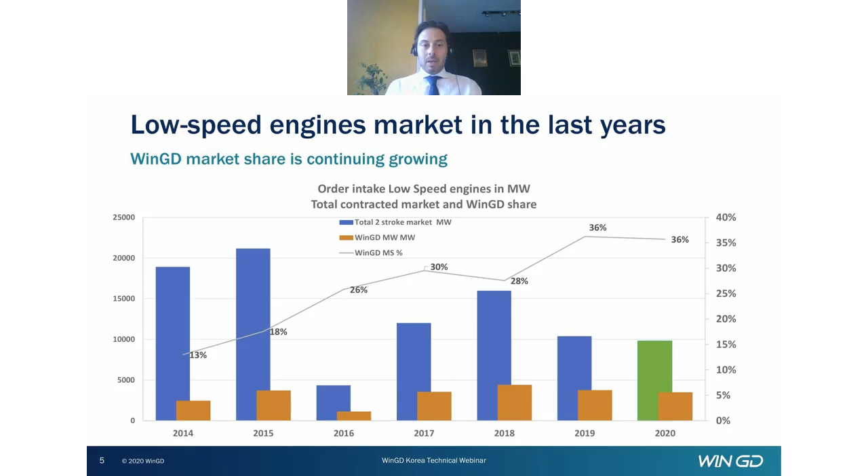About the ship market, the tanker market was quite strong. Many VLCCs were contracted. The market was relatively weak, but anyway, as expected.

LNG carrier was as expected, so a good market, a strong market. Overall, the expectation for 2020 was actually better than the forecast, but still the market is relatively low. We expect for 2021 a market recovery.

A little bit about WinGD and what we sell more. We sold last year 152 engines, 111 are XDF, and the rest are diesel engines. So XDF for WinGD represents almost 60% of our contracted volume.

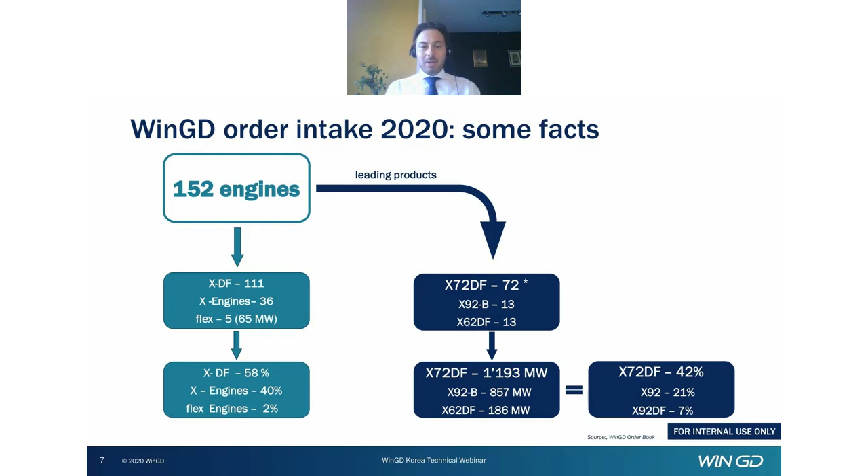Our best seller is the 72DF, especially for LNG carriers. But last year we also had 92B for container ships and some 62DF for other ships, not LNG carriers. So that gives a little hint about where our portfolio sells more.

Now, what is very important to remark here today is that our most important customers are Korean shipyards and engine builders. The first two shipyards are Hyundai and Samsung. The first two engine builders are Hyundai and HSD. That is very important to remark.

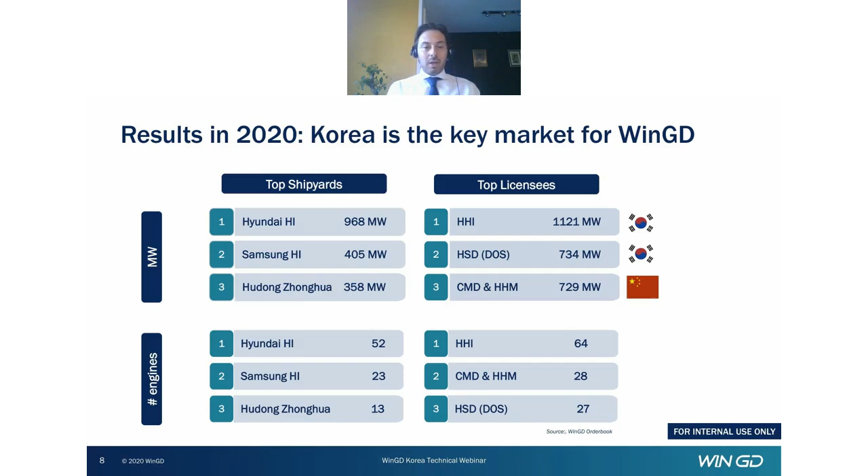WinGD believes that Korea is still our strong market. We have a very strong team in Korea. We want to continue the collaboration in the Korean market. So that is very important to remark. Our relationship with Korea is for us very, very critical and strategic.

Now let's see a little bit about the market in several countries. Globally, WinGD reached 36% market share. In China, we achieved 40% market share. I would say that the market last year was split between China and Korea. China had almost 5,000 megawatts, Korea 4,400.

In Korea, we reached 30% market share, a little bit less compared to 2019, but still, as I showed you before, Korea represents for WinGD the first customer. In Japan, the market is a little bit lower, only 384 megawatts, and WinGD still has a good presence there.

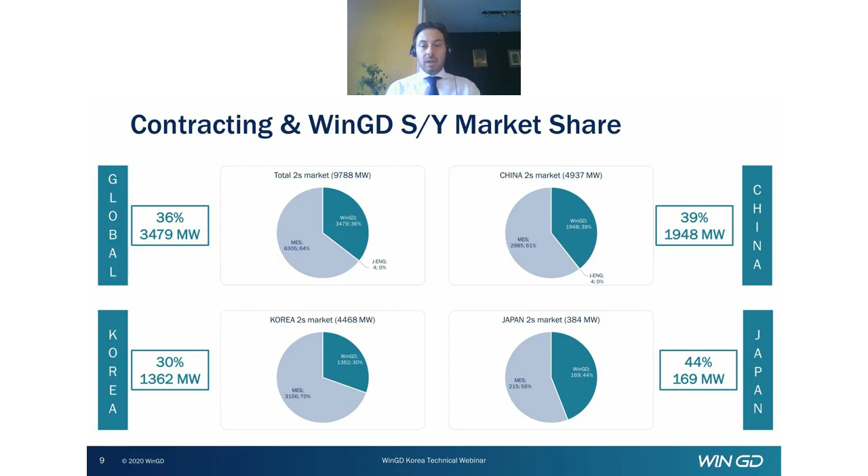For WinGD, the dual fuel market is very important—the LNG powered ships—which last year was very strong. 27% of the order intake are LNG fueled ships. That demonstrates that LNG is the bridging fuel, and the market share is increasing. The share of LNG powered and fueled ships increases more and more.

If we look at this 2,700 megawatts, almost 42% are LNG carriers, but 58% are not LNG carriers. That is a very important sign. WinGD has 60% market share for LNG fueled ships, so that is also remarkable. For diesel engines, we have 26% market share, but there is also some improvement, especially because of the latest engine that we have developed.

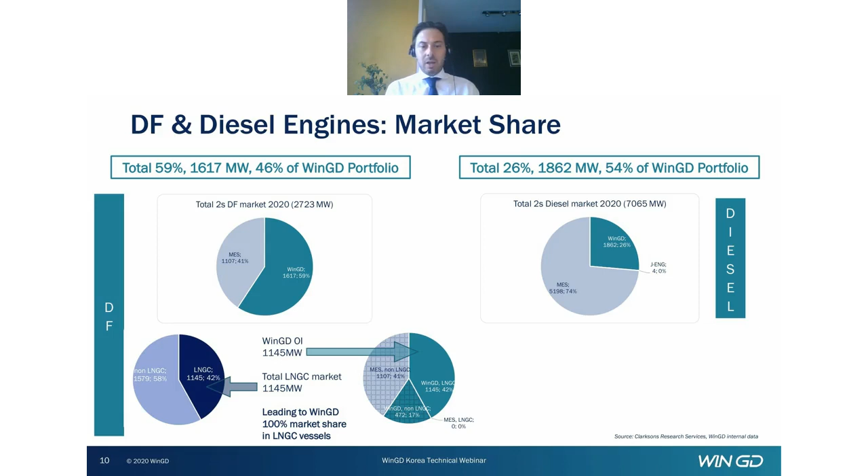Now, to conclude, for 2021 we expect the market will recover. According to market analysts, the total market will recover by about 30%. The segment that will have a good recovery is container ships. We already see a lot of activity at the beginning of the year, with many orders in discussion.

For LNG carriers, we expect an increase of about 20-25%, so more ships will be ordered. We also see a lot of projects in discussion. The bulker market will have a big jump—we expect it will almost double, more or less. For tankers, there are also signs of recovery.

So that's from my side. I would like to thank you. I would like to remark that WinGD wants to continue the collaboration with the shipyards in Korea. We believe that is very strategic for us, and we have in discussion a lot of projects, including the introduction of the XDF 2.0 with the major yards. We believe in the strong support of yards and engine builders. So thank you very much from my side, and back to you.

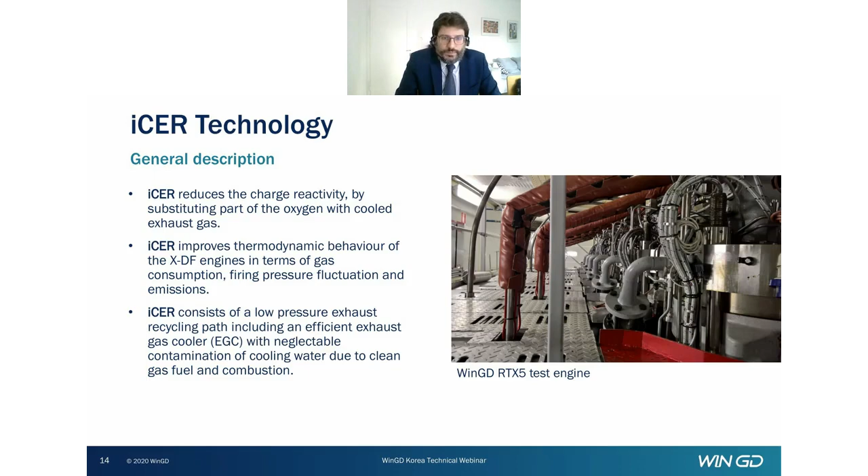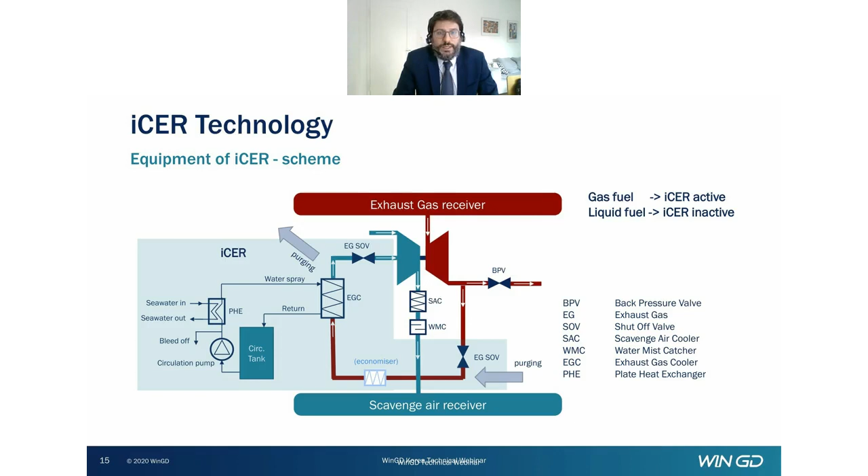Moving on, the benefits of the iCER are reduced fuel gas consumption. In addition, we have a reduced liquid fuel consumption when operating the DF engine in diesel mode, which is a result of the increased compression ratio achieved by installing the technology on the XDF engines. And of course, last but not least, we have a reduction in the methane slip of up to 50%, which is a result of allowing the exhaust gases to burn once again in the cycle by recycling.

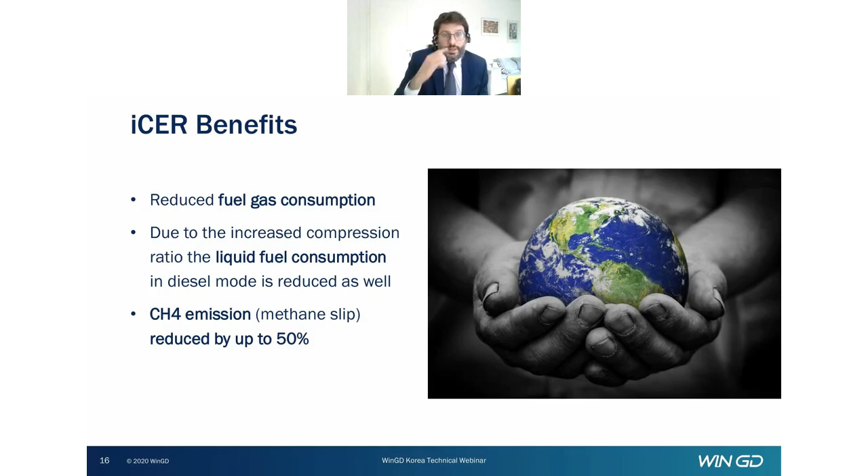If we look at the improvements in the gas and diesel fuel consumption, we've taken as an example a typical LNGC vessel, with the typical CMCRs for such LNGCs with 5X72DF. If we look at the graph, you can see on the left-hand side the improvements between the XDF and the XDF 2.0.

We're going from improvements of between 4 and 6 grams, and at the lower loads, of course, the improvement in gas consumption is better. This better improvement is a result of the firing pressures that are achievable, because at the high loads we are limited by the max firing pressure from the engine structure. Similarly, you see the improvements when comparing to the standard XDF engines in diesel mode.

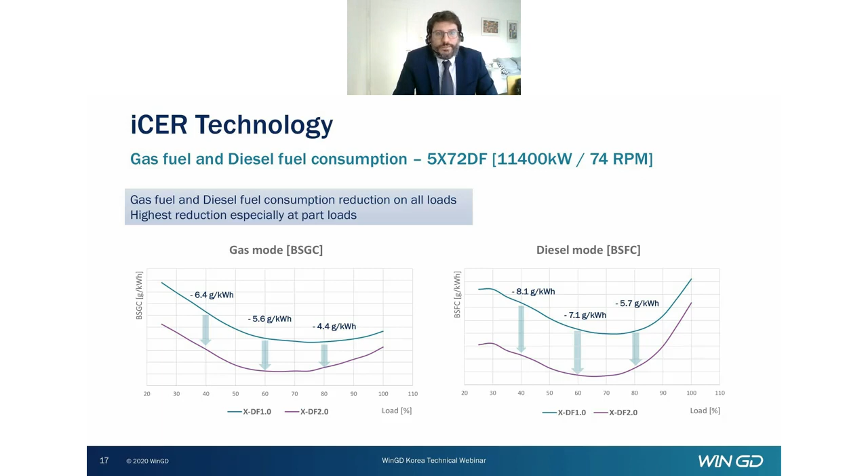Here's an example of the proposed arrangements on a 5X72DF 2.1. The ICER equipment is placed as close to the engine as possible. This ensures that we can have minimum adaptations to the vessel design, and use up minimum space in the engine room. This arrangement is possible on other vessel types as well, depending again on the engine room designs.

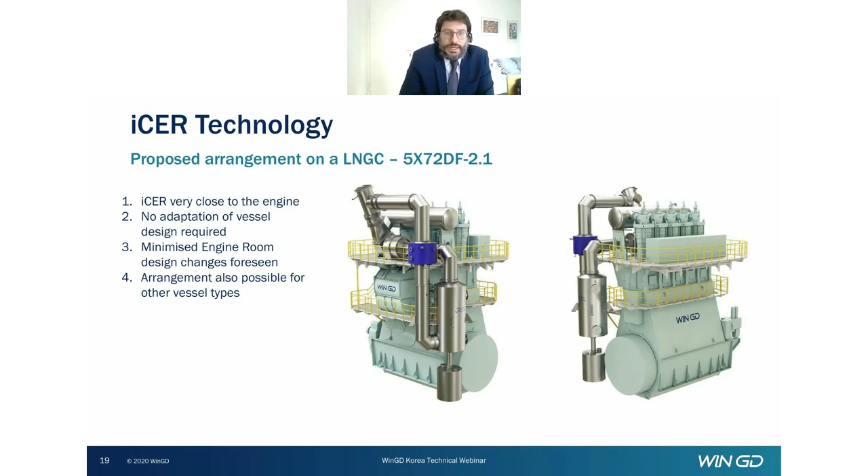Some information, just an overview about the differences between a standard X72DF and an X72DF 2.1 with the ICER technology. The engines with the ICER technology, in case of X72, are 5 to 7 cylinders at the moment, because we have first released the single turbocharger executions. Other differences compared to the original X72DF include a small optimization on the bed plate, a new bed plate with flexible main bearing girders.

The most important change is a new control system, moving to the WiCE control system instead of UNIC. The supply unit is the same. The fuel gas supply system can be GVU or our IGPR. The ICAT system is optional.

Then there are the ICER related updates, which include some changes - a new design group on the engine side at the turbocharger inlet. And in the engine room, mainly there's the space reservation required for the ICER equipment, and some changes to the MIDS related items for the cooling water system, exhaust gas system, and leakage collection system.

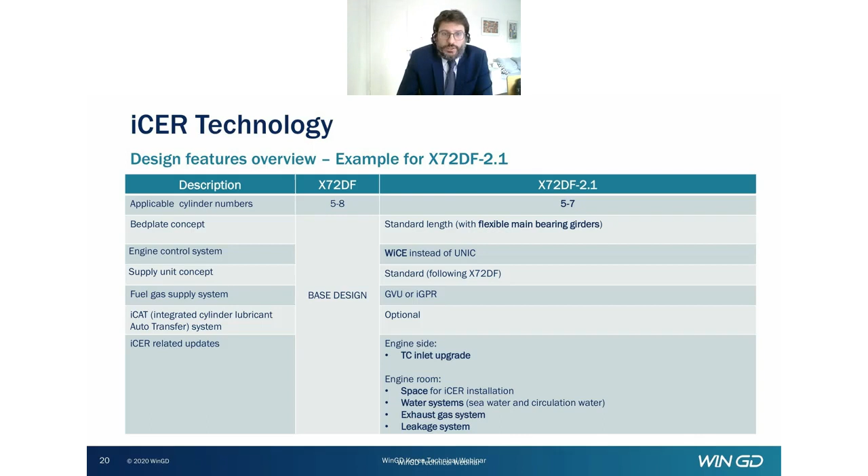Some information about the estimated bleed off water amount. The recirculated exhaust gases are cooled down to below the dew point, 42 degrees Celsius, so water condenses out of the exhaust gases, and bleed off water is positive most of the time. The final amount of bleed water will depend on the ambient conditions, and this you can see in the graph to the left.

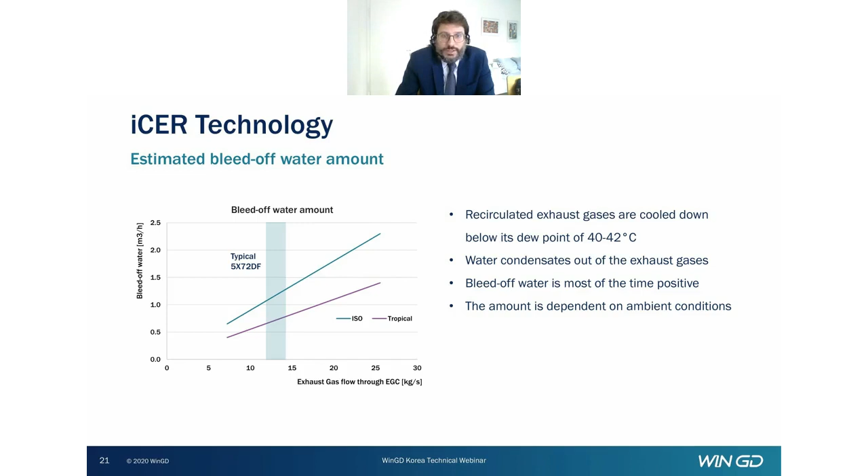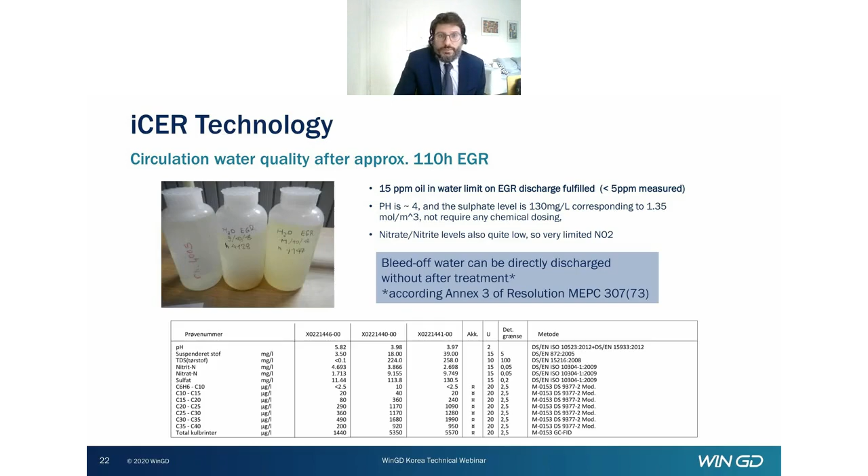With the ICER technology, we can improve combustion stability. On the x-axis, we show the gas reactivity, which depends on the exhaust gas recycling rate and the air to fuel ratio. The reduction of the pre-mixed gas reactivity leads to an increase in the ignition delay and slower combustion speed.

Increased resistance to auto ignition and the reduced combustion speed enable control of the combustion phasing even at higher loads, and a reduction of the firing pressure to stay within limits. This ultimately allows an increase in the geometric compression ratio and consequently an increase in thermal efficiency in both gas and diesel mode operation. And of course, we have a reduced sensitivity to ambient conditions.

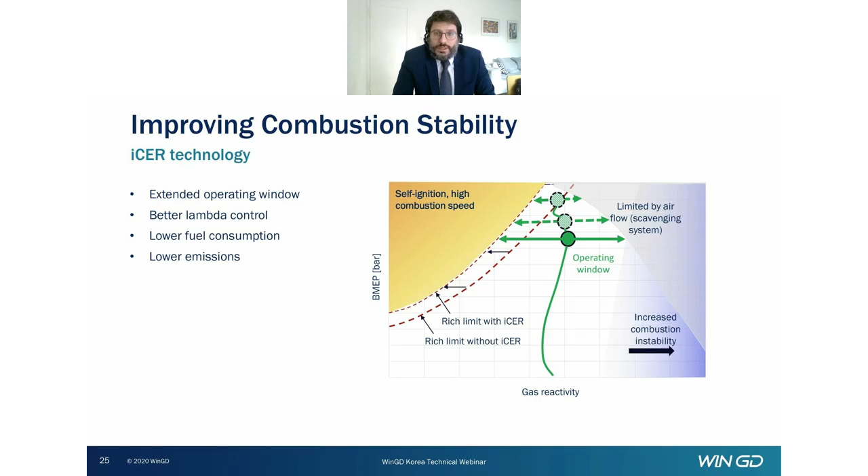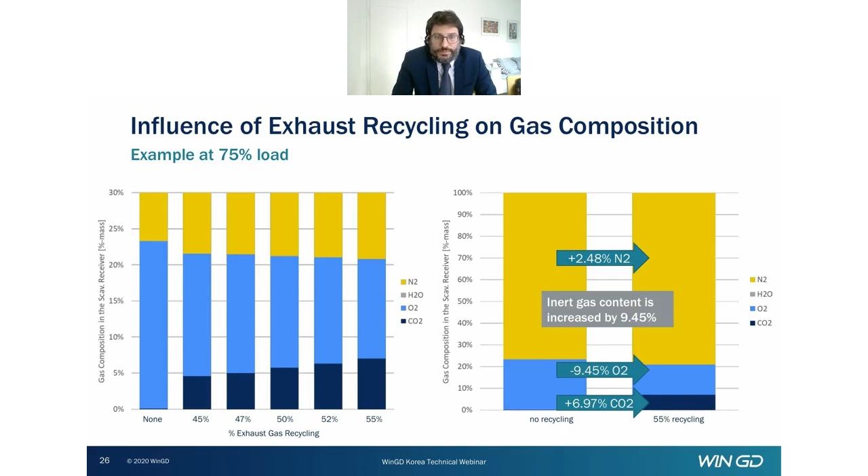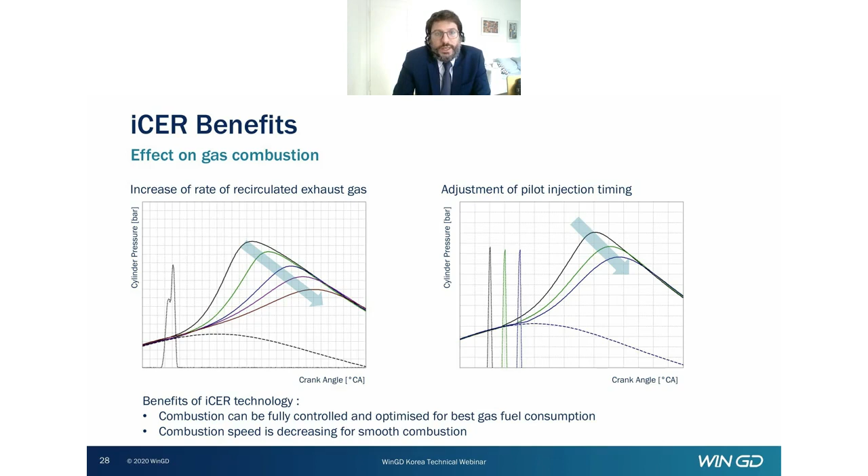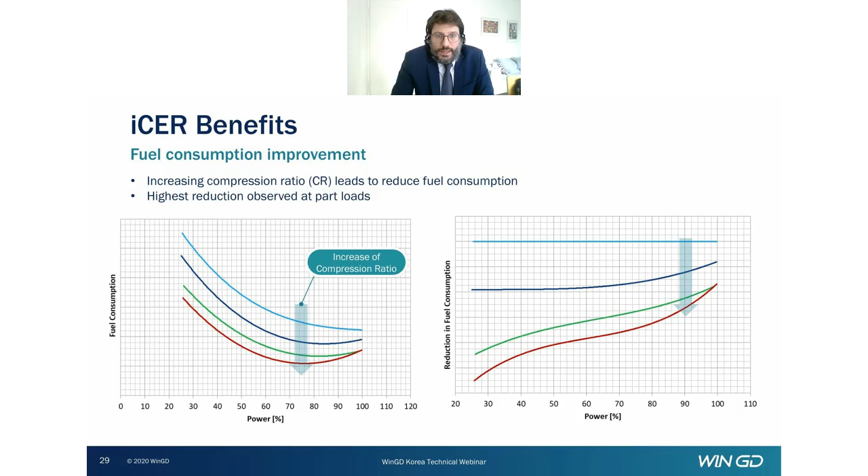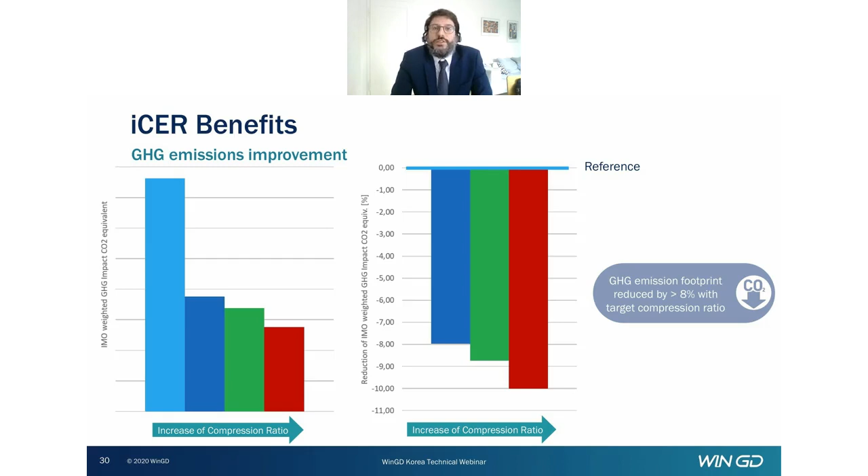The blue shows the standard current compression ratio used on XDF engines without the ICER. As we move to the right, this is increasing the compression ratio and showing the effect on the overall CO2 equivalent emissions. Again, with our target compression ratio, based on our test results, we are achieving approximately an 8% reduction.

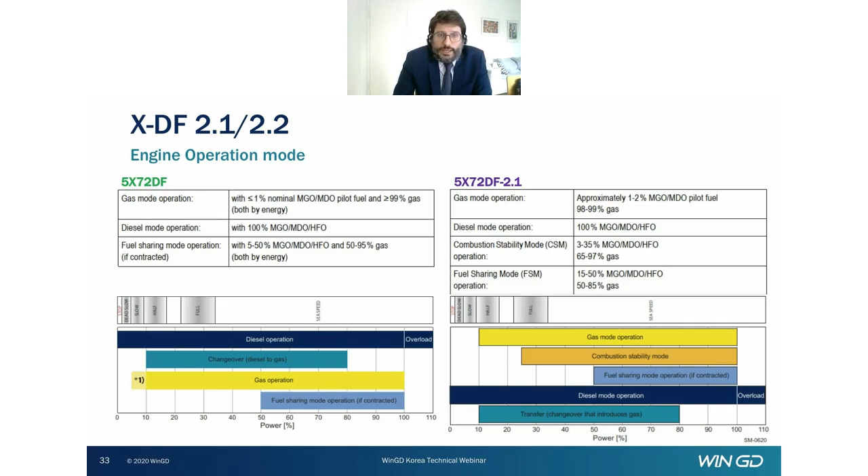Moving on to the details of each mode, this is all described in detail in our marine installation manual. Diesel mode remains unchanged, and gas mode operation as well. The new mode we have is the combustion stability mode, and I would like to provide a few more details about that on the next slide.

The purpose of this combustion stability mode is to have stable engine operation in case ICER is not working. So if the engine needs to continue operation on gas, but the ICER equipment has malfunctioned or there are issues with the control system of ICER, continued operation in gas mode is ensured over the entire load range, even without ICER in this mode.

This can be active at as low as 26% power. The engine control system always handles the ratio between gas and liquid fuel injected, especially at higher loads, controlled by the engine control system to ensure always stable operation. With the CSM mode active, the engine is always Tier 2 compliant.

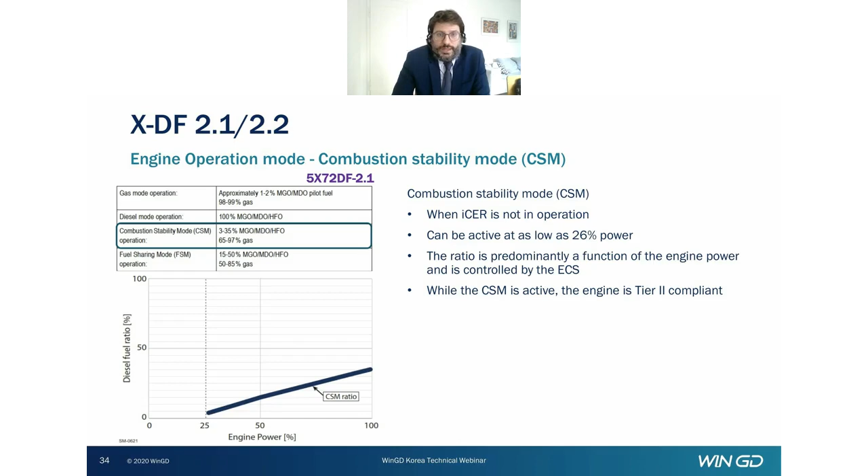There's an exhaust gas cooler circulating pump, which circulates water from the circulation tank through the plate heat exchangers, cooling this fresh water, which is used to cool down the exhaust gases in the exhaust gas cooler, and then continuously goes back to the circulation tank to complete the cycle. The freshwater level in the system is kept by a level switch and a solenoid valve, so in case there's excessive water in the circulation tank, this is automatically let off.

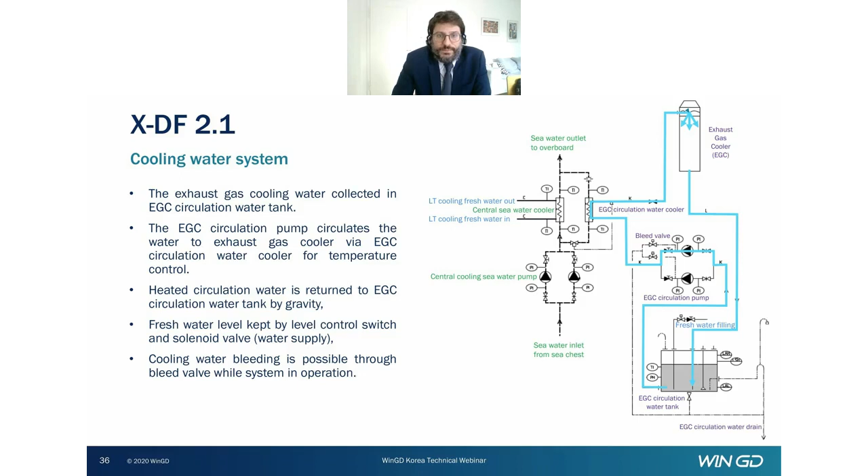We do foresee at the TC inlet, this will be part of the engine group design. So from the flow regulating valve downwards to the turbocharger inlet, the housing, the connection piece, and a water trap, we foresee will be part of the engine scope of supply.

Placing the ICER close to the engine, as mentioned before, requires no blower and has a number of advantages: first, a faster response of the exhaust gas rate to the engine; then, no risk of condensation in the duct due to higher temperatures; and better fuel consumption due to improved characteristics. Thank you very much.

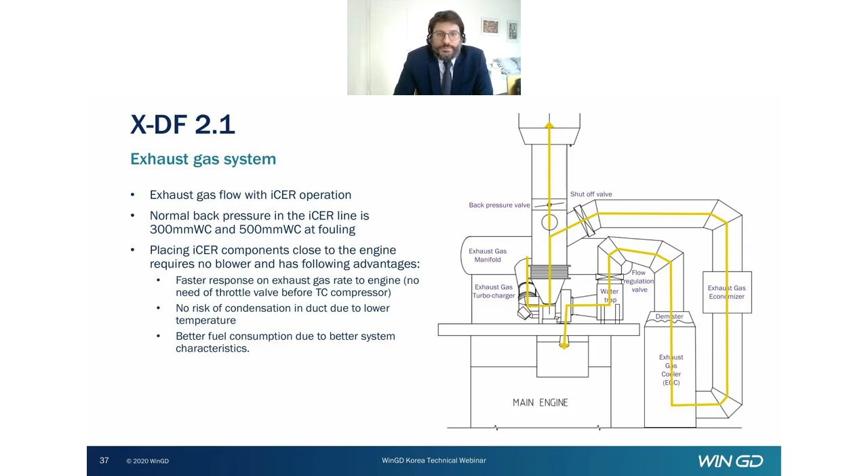Well, thank you, George. Good afternoon, everybody. I will have the pleasure to introduce you to our brand new 72DF engine, the upgraded version. This was shortly touched on by Kim and George earlier, and we will dive now a little bit into the details. My name is Adrian Siegfried. I took care of product management before, and now I'm leading our new customer support team in WinGD, Switzerland.

So, in a nutshell - yeah, I apologize, that's a lot of text. Why are we doing this? Why do we upgrade the well-established 72DF?

As a matter of fact, we had this in mind for a longer time, and we want to beef up the engine with the latest technology which is meanwhile available, such as the WISE control system. The rollout into the portfolio started, and now with the 72DF, with the 1.1, 1.2, 2.1, 2.2 versions, these will also be taken in.

The DCM unit comes significantly simpler along with the WISE control system. Less modules are needed, so this is a logical consequence. We have a strong focus on optimizing the production cost by various measures.

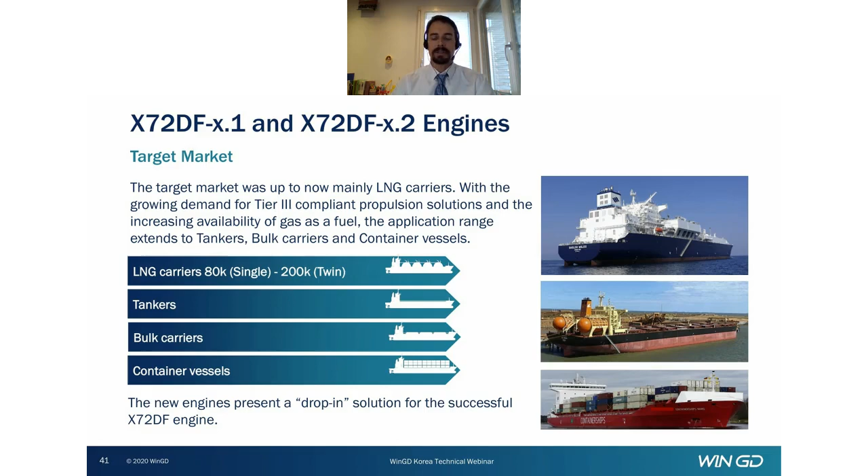And the target market, we can argue that the X72DF engine was very successful for the LNG carrier market in the recent past. But we also would like to extend the applicability to other ship types like tankers, bulk carriers, container vessels, ships in this mid-segment where the new 72DF engine can present a drop-in solution. A drop-in solution in respect that not much has to be changed on the engine room side. So the new engine should fit widely into existing ship designs based on the old so-called 72DF engine.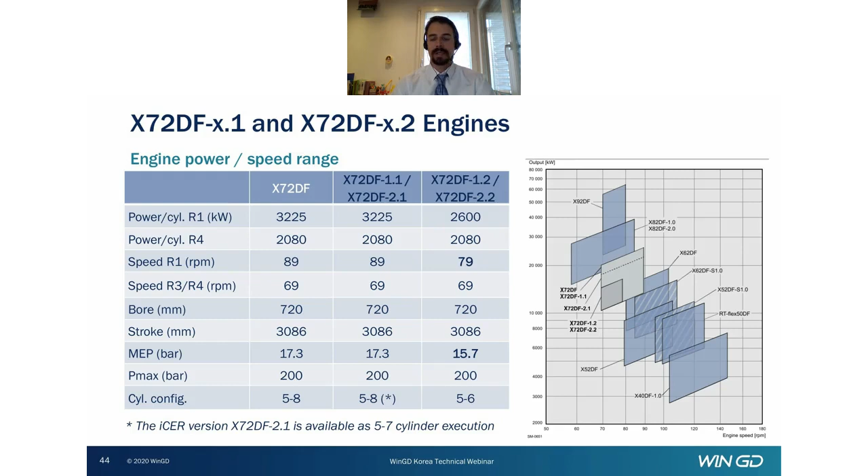Cylinder configuration, I mentioned, the 0.2 engines will be applicable as 5 to 6 cylinder, and this will allow quite some benefits on the engine structure side. Here, once again, stretched apart: on the left-hand side we do have the 1.1 and the 2.1, the whole rating field, which has the same coverage as today's 72DF. And the smaller marked area out of that, this will be the 0.2, the 1.2 and 2.2 engine, with reduced R1, R2, R3 points, while R4 will remain the same. And along with this, also a reduced maximum power output and reduced MEP.

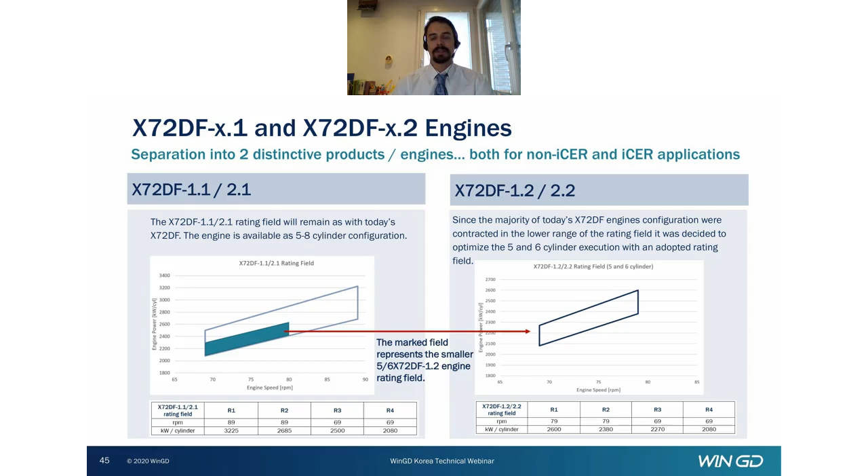So, here we have it a little bit simplified. I hope it is simplified or easier to understand. Engine details, what do they look like, or what will they look like? On the left-hand side, we have the 72DF 1.1 engine, applicable as 5 to 8 cylinder engine, with the flexible girders, some weight optimization on the bed plate which is meanwhile validated. We have it introduced on the 92DF, on the 72B engine, and now the 72DF 1.1 will be the next one. The crankshaft will be a FCV4 standard execution, as is already available since last year.

Subject, of course, to torsional vibration calculations, but this is available technology. The engine control system will be the WiCE, the next level we have now. And the supply unit, we stay with the standard supply unit on the engine as we have it today, with 2 or 3 fuel pumps of the big size.

The 1.2 engine on the other side, 5 to 6 cylinder, will become a little bit shorter. We do have a shortened bed plate, and this is feasible because we apply a smaller supply unit. We were in the lucky position that the newly developed supply unit for the X62S engine also fits on these smaller rated 72DF engines. So this small supply unit, in conjunction with a shortened thrust section, will lead to a shorter bed plate by roughly 300 millimeters.

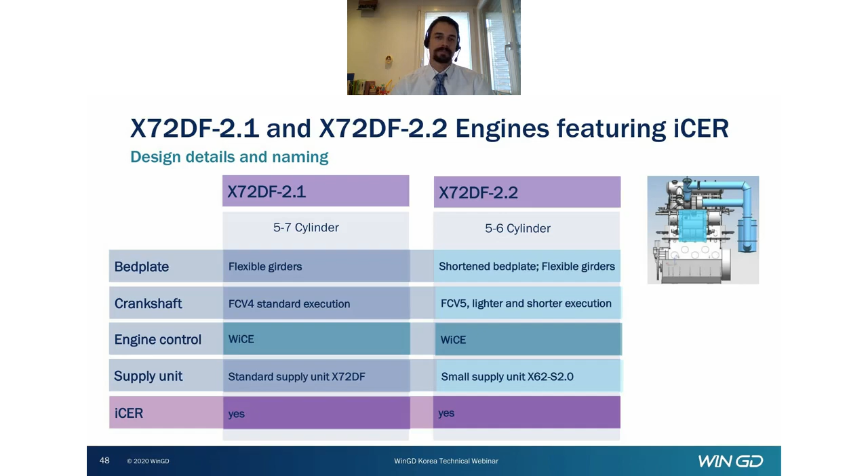A brief overview: we are combining existing technologies into a bundle and applying this on this engine upgrade. Bed plate, this is existing from the 92DF concept of the flexi girder. We are currently also looking into the optimization potential for the cross head. There seems to be something feasible.

The rail unit box on top left side will be adapted from the 72B engine, which already has the WiCE control system. On the cylinder liner, we actually stay with the 72DF with a uniflow cooling system as we have today, although the port height will be adapted for iCER and higher compression ratio. And the crankshaft, already mentioned as a FCV5 execution, subject to TVC allowance, representing a cost optimization.

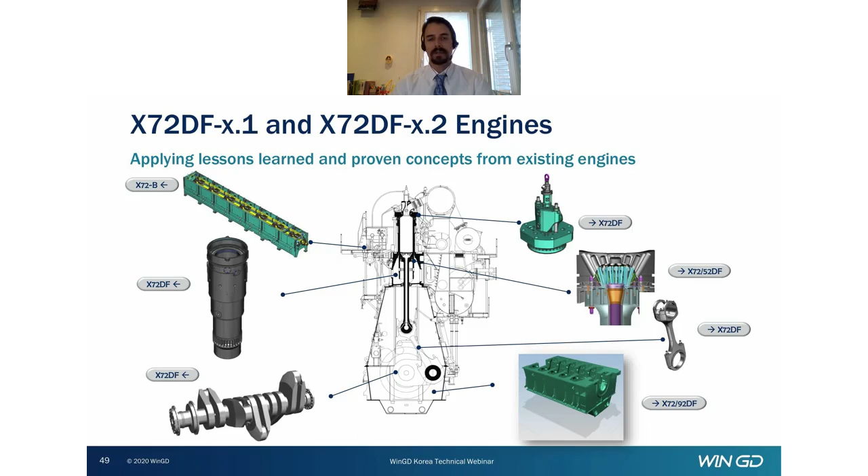In a different view now, engine management, top left side. Yes, we have the WiCE. I mentioned the rail unit box from the 72B will be adapted.

The conrod crosshead guide shoes, we are looking into some weight optimization there. This looks actually quite positive meantime. Then, drop-in solution, the 62S supply unit, more compact, using the smaller size fuel pumps as we have them on the RTFlex 50 engines today with a very good track record.

Bed plate girders, this was mentioned—we move to the more flexible girders, lighter girders. We also implemented this opportunity, a new foundation bolt concept, basically downsizing the bolting. Shorter thrust bearing section, I talked about that. Then we move to the right side bottom, the shorter crankshaft, lighter execution of the FCV5.

Scavenging, of course, the scavenging group will need adaptations not only for the ICER, but this is now also a chance to introduce the new cooler generation. Finally, on the 72B engine, the C-type cooler. Then piping platforms, they will undergo some optimizations, adaptations of course. Also reinforcements may be needed for the ICER. We will also implement the air separator onto the engine structure again.

And on the hot parts, we increase slightly the compression ratio. We will implement a new pre-chamber design with better sealing capability, and piston ring design will be updated. Piston ring and piston crown design will be updated to the latest standards.

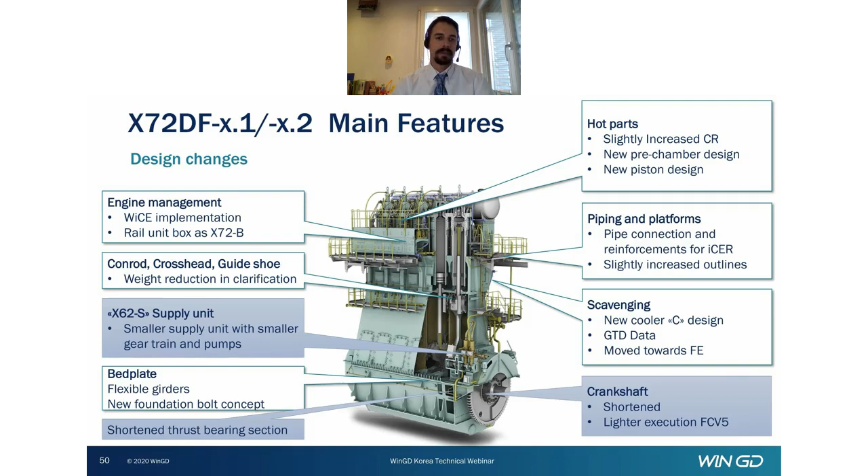Yes, this is more or less the same, I would say. We stay, of course, with our X-flex control system, with the flex control in respect of a servo oil, high pressure system, 300 bar. The cylinder lubrication system will now finally be the FlexLube ε, our latest pump design, which is more accurate and which should also bring the production cost down over time. Bore cooled combustion chamber components, no change in that.

Fuel pumps, depending on engine rating. This is then relevant for the 1.1 engines.

Okay, the WiCE control system. Yes, maybe to mention, we intend to stay with the fast injectors as we have it today from L'Orange Woodward. Meantime, the track record has improved quite significantly. We have seen service feedback.

The crosshead lubricating system will keep the booster pump as today. Crankpin bearing, we stay with the aluminum coating. We have seen this is actually working very, very well in operation. Not a single fail till date, so very good track record.

The footprint will change a little bit for the 0.2 versions, but only in respect of engine length. So the width and the height and so on of the engine remains the same. And finally, we will have both iGPR and GVU solutions if somebody is interested in that, which are fitting for the new 72DF engine.

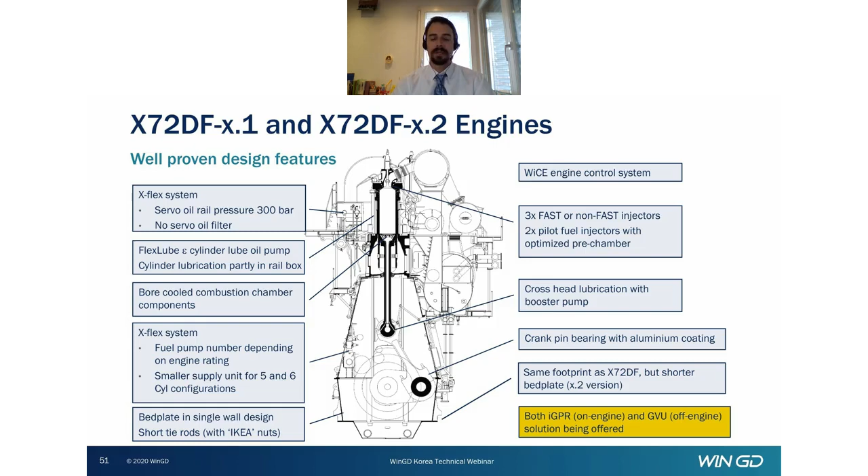Project timeline, a few words on that. We do have pilot projects in focus in Q1 2022. One year from now would be bedding roughly. And we are now working hard to get the drawings ready in time. The TIN, the official announcement of the engine to the market, has been released just recently.

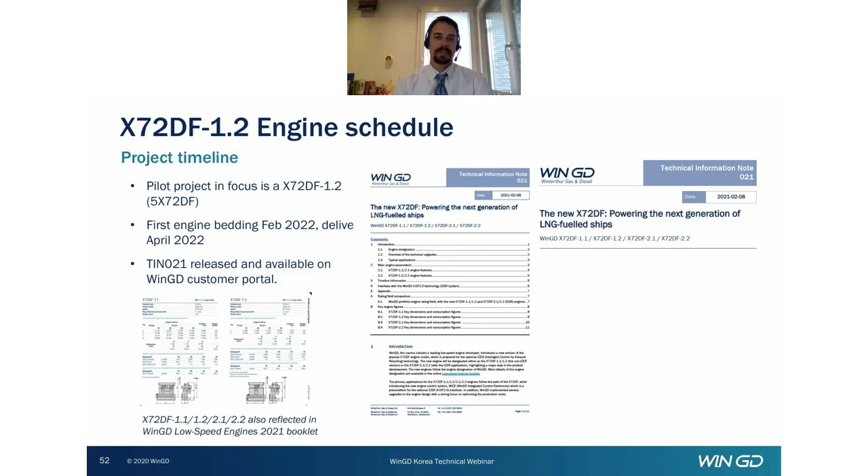This is available on our homepage, and WinGD also released a press release last week that the new engine is coming. And with this, I'm at the end of my presentation. Thank you very much for your attention.

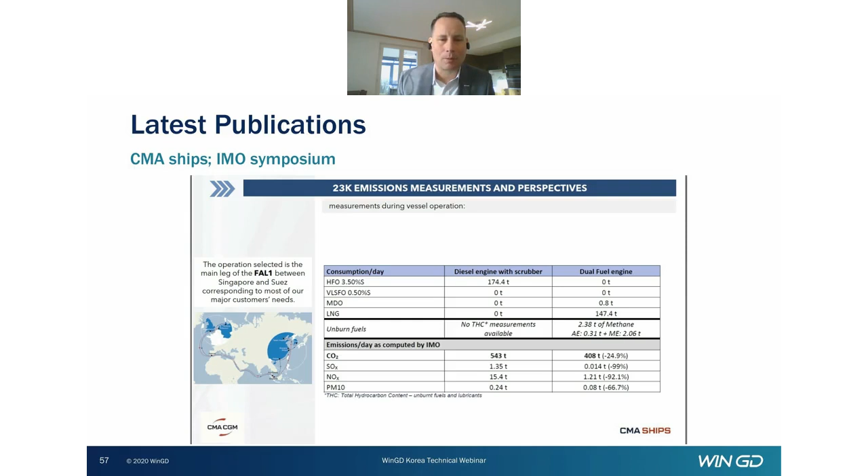Another impressive announcement was the one last week by AP Møller Maersk. I'm sure you have seen that. They made a press release that they will have the world's first carbon neutral liner in operation by 2023. You had to read through the text to see that they actually count on methanol as fuel.

Again, methanol is carbon neutral. The main decision in the background is actually that AP Møller now starts to invest in dual fuel engines. So far they have refrained from that, and now they act, and will start to order the first dual fuel vessels.

Here, 2,000 TEU is highlighted very clearly for regional deployment, where methanol is available in sufficient amount. It's not yet a fuel available on a global scale. Nevertheless, this is an important step in the right direction, and it clearly shows that high flexibility from the technology provider is needed.

Some considerations on the fuels here. The graphs are originating from WinGD internal studies addressing the whole variety of fuels available and benchmarking them with a reference fuel. The reference fuel is always MGO, which is available in sufficient amount to the industry. Now, if you look at the different fuels, here we see hydrogen, ammonia, methanol, and methane.

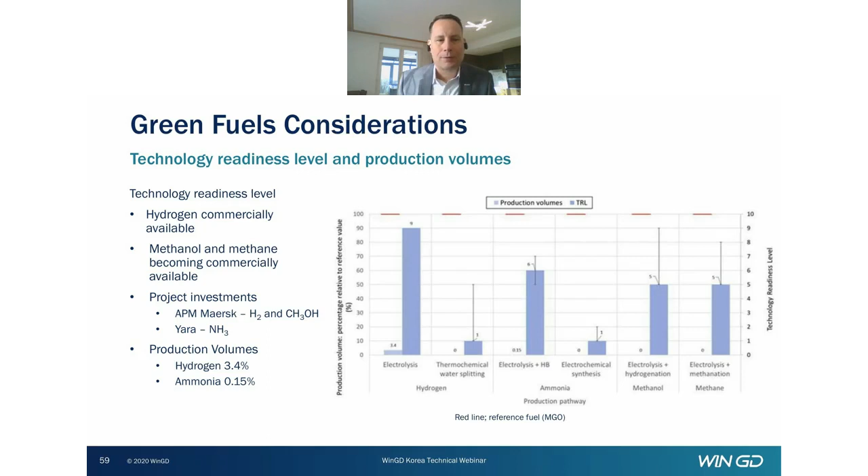Another perspective on these fuels is related to production cost - and clearly, production cost, that's not the value in the market because there might be some incentives, and process efficiency. Also here, this is always compared to MGO as reference fuel.

In a nutshell, we can say that hydrogen and methane have the highest average and upper boundary efficiency. What that means is that to produce hydrogen and methane needs the least energy compared to the other renewable fuels listed here. So ammonia, for example, or methanol, need more energy to produce than hydrogen or methane.

In the base benchmarking here, the carbon dioxide origin is not accounted for. So if it's, for example, coming from an extensive carbon capture program to reduce carbon in the atmosphere, then of course the efficiency would be further decreasing for methanol and methane.

The production costs - hydrogen and ammonia are the most feasible. You can see that they come in at about factor 3 compared to MGO. If you look at the graph, methanol and methane show the biggest range. So while the average is rather high for methane, for example, at almost 5 times of MGO or even more, the range is very huge.

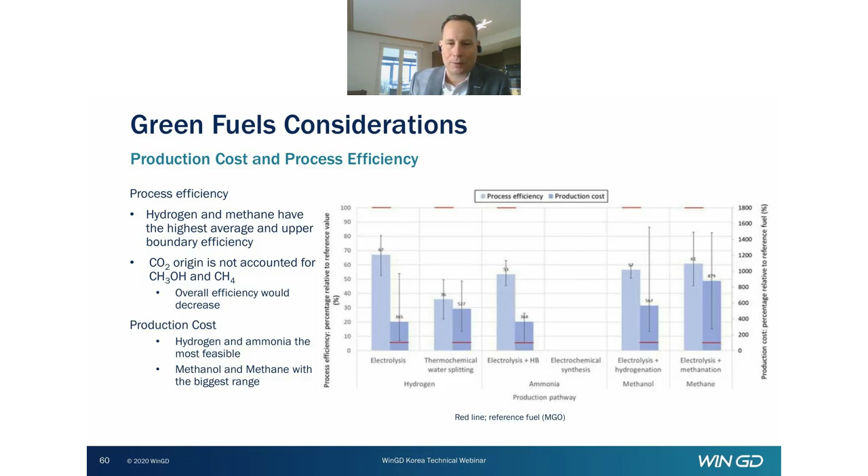Here a bit of a complicated table. What I want to show here are some highlights. On the left, in the first column, you see parameters which are important for us as an engine technology provider. We need to understand the fuel, and then we compare all the fuels amongst each other, benchmark them. You can see here that, for example, hydrogen has a boiling point of minus 253 degrees, so storage is a challenge. But then also the lower heating value, the energy we put into the engine with the fuel, for methanol and ammonia is 60% lower compared to methane, while hydrogen is 140% higher.

So the volumes differ quite considerably. And if you prepare an engine for several fuels, like a 3-fuel engine, you need to consider that. It's quite a challenge.

Another important parameter is the auto-ignition temperature of the fuel. Here you can see that the alcohols, methanol and ethanol, have a disadvantage. They ignite quite early at low temperature. That means the Otto cycle is actually not really an option for these fuels because there might be early ignitions.

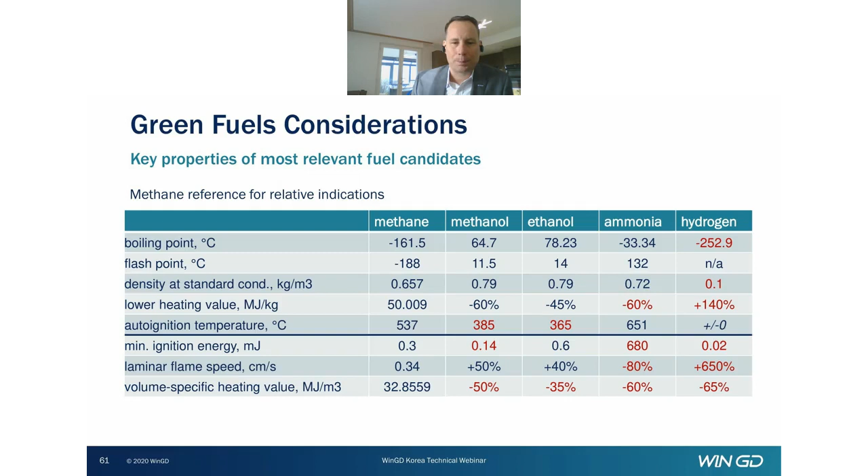Then the regulatory considerations. Of course, the regulators mainly focus on emissions. The safety standards are becoming available. Just recently, DNV-GL, or DNV now, released the very first draft document related to ammonia, so some standards are becoming available.

But what remains unclear is the gases emission regulation, particularly the greenhouse gas and global warming potential of the fuel. We just had EEXI and CII introduced. The road forward is a bit unclear. The EEDI phase 4 is being discussed, but the global warming potential considerations of various gases needs to be clarified.

For example, black carbon is a big discussion at IMO. CH4, the methane slip, is unclear—will it be added or not? NOx has a greenhouse gas potential—how will that be accounted for? N2O, particularly addressing ammonia as fuel, becomes an issue—how to address this with global warming potential?

And then, even if nobody likes the idea, we also have to account somehow for the CO2 emissions from neutral fuels. Even if the fuel base is CO2 neutral—the CO2 is retrieved from the atmosphere when the plants grow, for example—in the combustion, after the combustion in the engine, CO2 is emitted and goes back into the atmosphere, and how to account for this needs to be clarified.

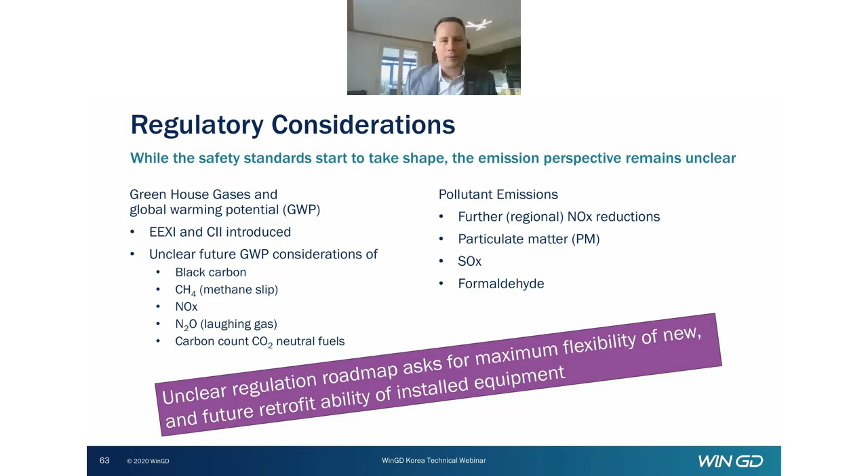To bridge over to the XDF platform and how we see the answer to this challenge. Here on the picture, you see on the right side the various fuels—you could add a couple more here. As an example, these fuels fundamentally can mostly be burned either in a diesel cycle or a lean burning Otto cycle. So our XDF engine, in our view, is actually the perfect platform to accommodate these fuels.

And wherever regulation goes, we are able to flexibly adjust our technology the best way. In other words, if you have the XDF installed, you have no dead end looking forward. You can retrofit whatever is needed as the regulation evolves or the fuel becomes available.

A bit more specific, the diesel technology is obviously better for efficiency, therefore CO2 reduction and CO2 equivalent reduction, because of the maximum combustion efficiency. It has disadvantages on NOx as long as high sulfur fuel is used, also on SOx and on PM. The diffusion cycle is critical for particulate matters.

And if you would use ammonia as fuel in this cycle, N2O will become a clear issue from the combustion, but also from the SCR after-treatment, where we will have laughing gas as a result—this needs to be addressed. The Otto technology, due to the low combustion temperature, is very beneficial for NOx.

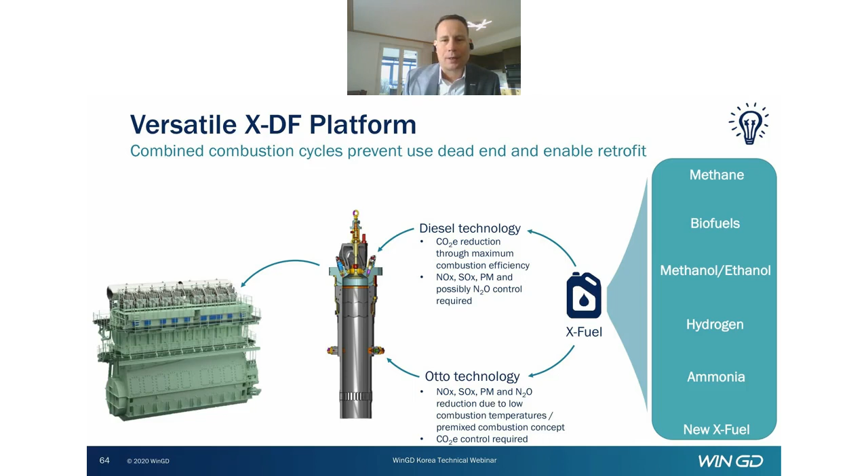So looking forward at all the fuels, we have built a matrix showing the retrofitability and applicability of each fuel. In the left column you see the various fuels, starting with low sulfur fuel oil, HFO still available, the base of fossil and biodiesel. Of course, the X engine is the perfect base here, optimized for such diesel-like fuels. It's really engineered, tailor-made for diesel fuels, including HFO, so the best solution for such fuels.

The modern X engines have the same engine base as the XDF, so actually any of the modern X engines can be retrofitted for Otto cycle combustion as well, so LNG, biomethane, synthetic methane combustion. They could also be retrofitted logically for an ammonia application or a methanol-ethanol application.

Hydrogen we do not really see as a pure fuel on a two-stroke engine because of the combustion speed and ignition, it would be a very fast combustion. Some people talk about almost an explosion. So here we see hydrogen at the maximum as a blend-in, or we have to introduce measures to reduce the flame speeds.

Now the XDF engine is based on the X engine but has additional features, so anything related to methane is already implemented by design. Looking forward, we see clearly also the retrofit ability of ammonia or methanol feasible. Actually, some of these retrofits are not even a big effort because the technology is available. Fundamental research has been done with some of the fuels, and it's just a matter of rolling out or making these solutions available to the market on the portfolio.

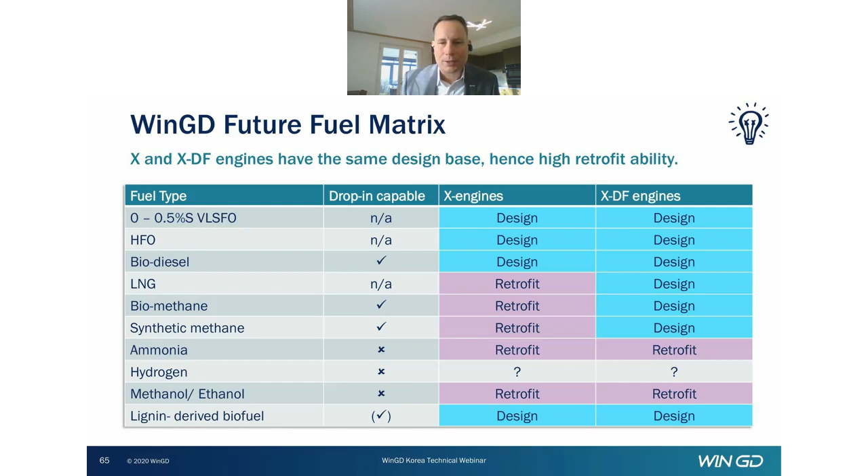With that, I close my section. Thank you very much for your attention. And I think I will hand over to Rudi Wettstein.

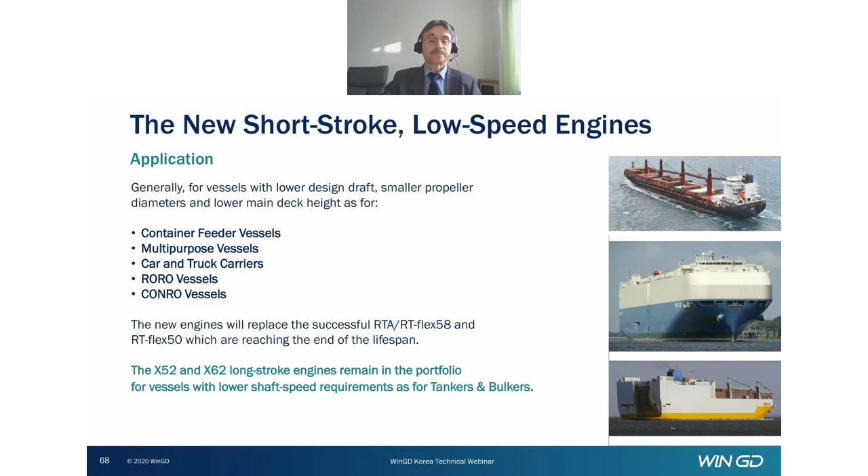So we can call the short stroke engines the container feeder and PCTC engine, and the engines which go into the lower RPM range, the typical tanker and bulker engines. Of course there will be overlap - you can see the rating fields are overlapping. So ship designers really have a choice to select one or the other engine if their project calls for a specific engine power and shaft speed.

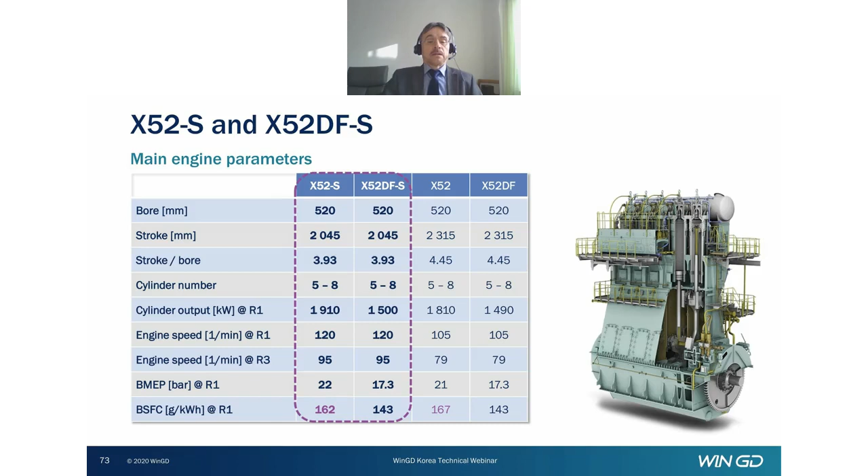Weight is something like 14% less than on the long stroke, and this will, of course, contribute very positively to the production cost. When we compare with the competing engines such as the S60, we are a little bit shorter, and also in piston removal, something like 180 millimeter lower.

The 52 bore dimensions show a similar picture, shorter than the long stroke, 1 meter lower piston removal compared with the S50-9.7. Here as well an advantage of about 0.5 meter in piston removal, also about 0.5 meter in engine length. Similar picture on the material demand components, something like 14% less total weight.

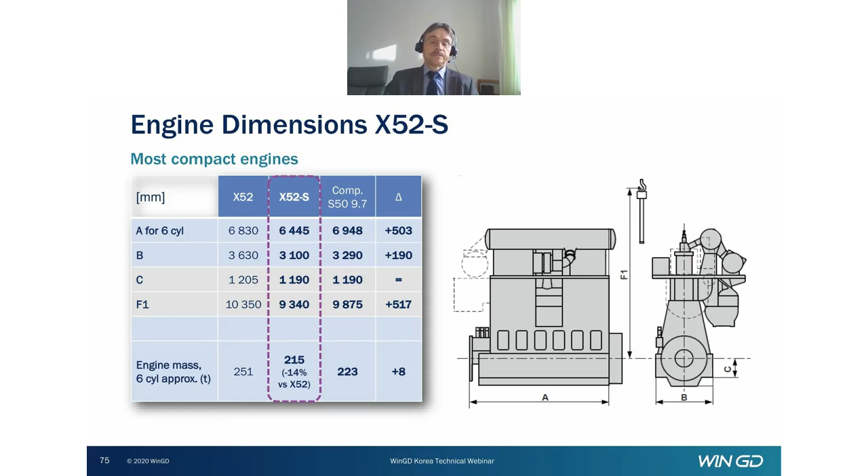Similar picture on the 52 bore, again the covering points A1 to A4. Here it's somewhat different because specific consumptions have been different, and also the influence on the rating field. Here we have something like 4 grams for the top rated engine and maybe 6 grams on 50% power on the lower rated engine. But again, on 90% power, something like 6 to 7 gram lower specific consumption.

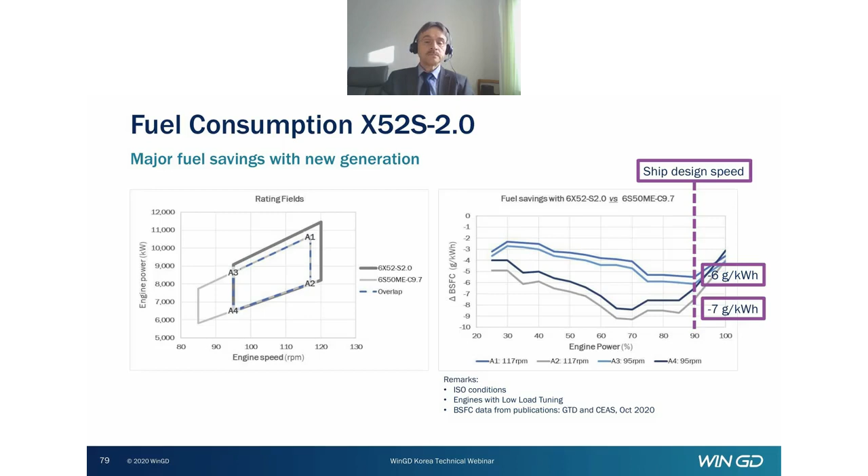Component designs, we see the major design principles here. Of course, we are using a lot of concepts from previous engines.

To the right side, all upgraded and new engines get this WiCE engine control system. Korean engine builders are already familiar with it because it's already in operation on the X72B engines. So it's a future-proof system with clear interfaces, modern architecture, and powerful processors.

Also on the dual fuel engine, we need only 1 processor per cylinder and not 2 as on today's UNIC system. Then the injectors on the diesel engine, we will have 3 fast injectors with long lifetime of 8 to 10,000 running hours. They are perfectly working on the diesel engine.

However, on the dual fuel engine, we foresee non-fast injectors because the fast ones are exposed to more thermal shocks, and their lifetime is not as long as the non-fast injectors. They are anyway backup fuel injectors, and with the non-fast, OPEX maintenance costs can also be reduced.

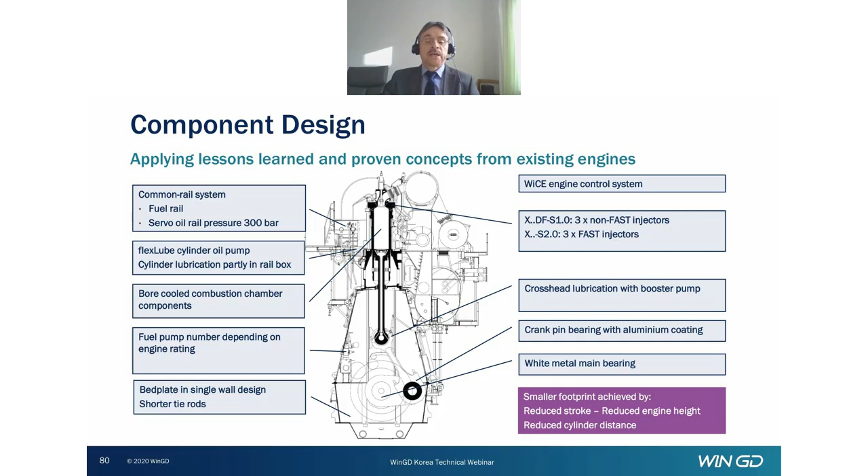The smaller footprint is achieved by the reduced stroke, reduced engine height, and reduced cylinder distance. Compactness is important, as engine room spaces get smaller and smaller. Here you can see that we have reduced the end journal on the crankshaft by 20% compared with the long stroke engines, and this results in a total length reduction of about 10%.

On the bed plate, we use the same girders, these flexible girders, which will adapt better to the bearing load for a better distribution of the bearing forces. So this is what we have used already on a few engines designed earlier.

The combustion chamber is designed for 5 years time between overhaul. Here I would like to mention the 2 piston ring concept, introduced on all mid-bore engines: 52, 62 and 72 bore engines. We have tested the 2 piston rings in the field for a number of years on a dozen different engines with 10,000s of running hours, and found it really of advantage. It provides better stability of the piston ring package, and in addition we can reduce first cost and maintenance costs. So 1 ring less means 30% lower maintenance cost for the overhaul of a piston.

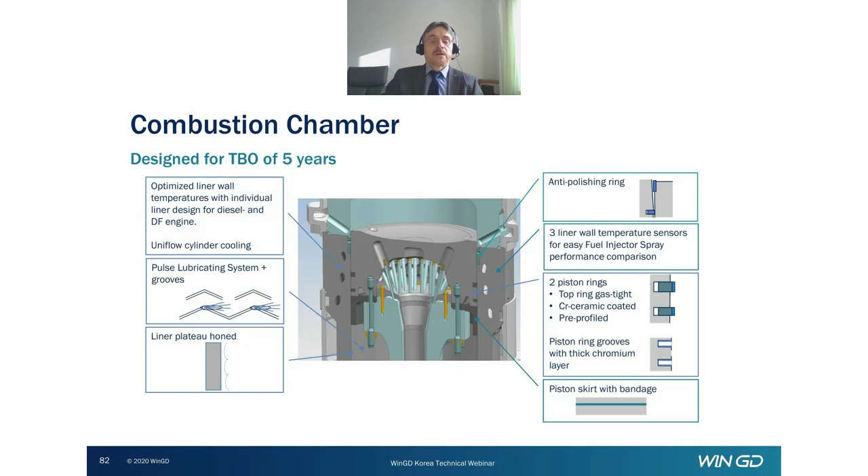A few other components: the diesel engine will have this injection control unit of the common rail system Mark III, as we use it on the RT-Flex 58 before. This unit allows onboard maintenance for lower total cost of operation.

The supply unit is in principle the same with regard to dimensions as we use on these mid-bore engines, 48 to 58. We have slightly rearranged the servo oil pumps. It is a very compact arrangement, which also helps us shorten the engine, the crankshaft and bed plate. And this WiCE module is already standard on the 92 and 82, and now also on the upgraded 72 bore engines.

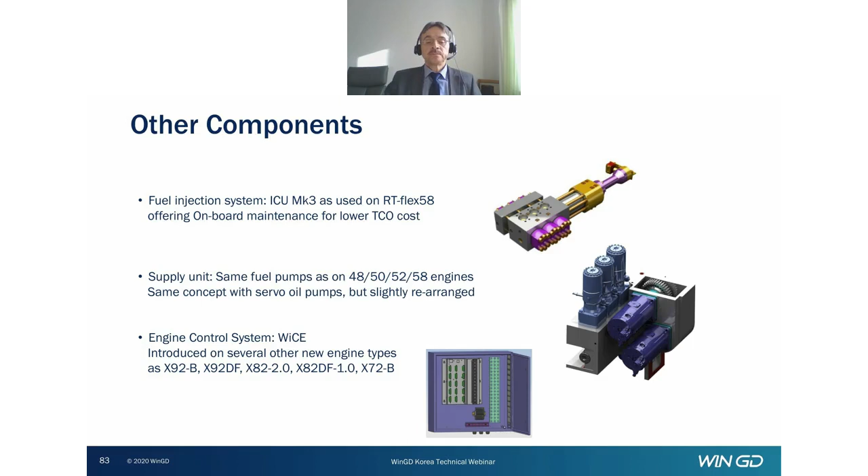Coming to the integrated SCR, a major development we have done over the last couple of years. It brings benefits to the shipyards: it will consume less space in the engine room than a high pressure or low pressure off-engine arrangement, and provide savings in installation and commissioning work by the shipyard. It is integrated into the engine structure, and the control is part of the WiCE engine control system. Each engine is optimized and tested together with the iSCR, not just the parent engine, which is a benefit as the engine gets a top optimization.

The design is done to run with gas oil, as NECA is always SECA. So that is, I think, justified for an iSCR, which is running a minor share of the operation time of the engine.

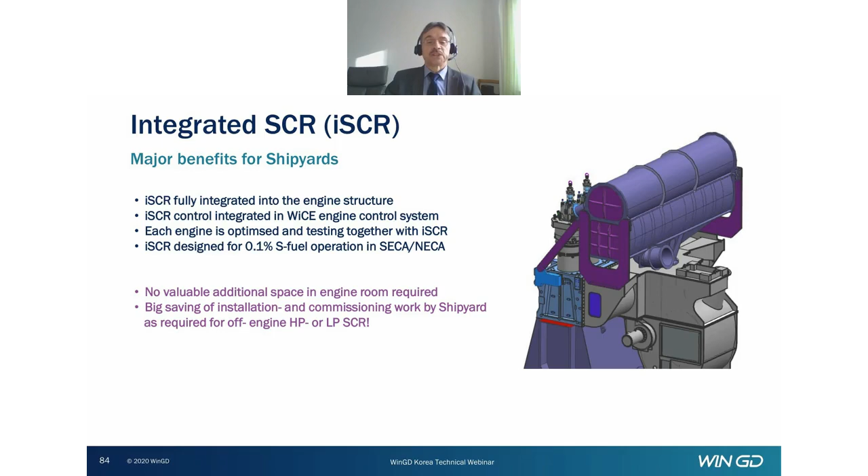Here we see the main components: in green, the catalytic elements. Then we have flow control valves, the urea injection and dosing system. Urea injection is just after the cylinders, before the exhaust gas gets into the receiver, so we have to find a position for good distribution and mixing of the urea with the exhaust gas. Then there is also a soot blowing system, an air supply system.

This is the arrangement of the prototype engine, which will be tested during next month on a 6X52 bore engine. In Winterthur, we have already tested the iSCR during last year on our test engine.

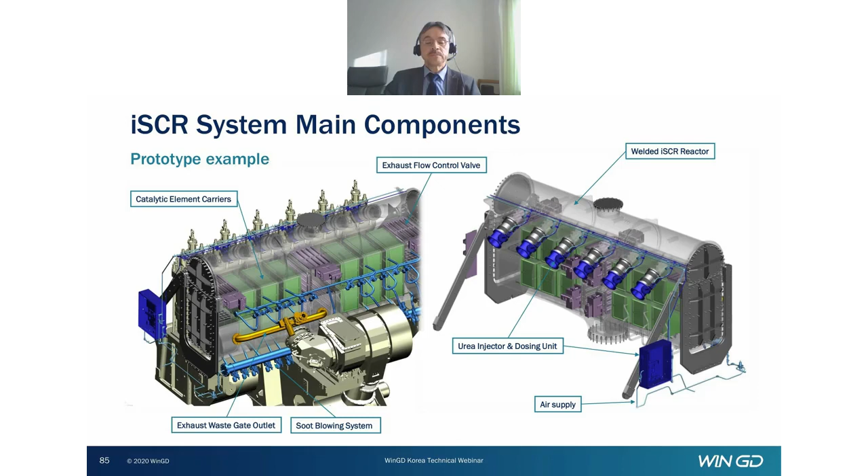Here we see the flow concept. In tier 2, we bypass the green catalytic elements, collect the exhaust gas and bring it to the turbocharger. In tier 3 mode, we open certain flaps and push the exhaust gas through the catalytic elements. We inject the urea, and we have this transformation of harmful to non-harmful exhaust gas.

We have evaluated a number of iSCR concepts. This we call the mailbox design. It is quite a demanding task in R&D to fulfill these structural, static, and dynamic stress levels, to have a good flow analysis, to keep the pressure drop under control, and to reach a good conversion of the NOx with a very minimized urea slip.

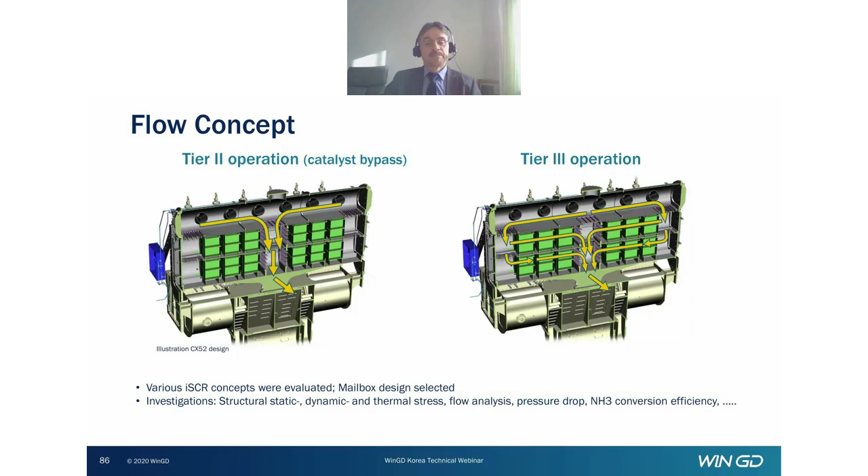A few words about the dual fuel engine. We keep the fuel gas and pilot oil supply system as on present dual fuel engines. The only change is we will fit an insert bush, a new shrink-fitted bush for the pilot injector. This bush remains always in situ when we are removing the injector or the pre-chamber, which means we can increase and ensure the tightness. Here we have cooling water, and with this always in situ installed bush, we can definitely avoid any leakage after replacement of the pre-chamber or the injector.

We have 2 gas admission valves per cylinder. This hydraulically operated gas admission valve has proven excellent behavior during the last 4 or 5 years in operation, with 800,000 running hours on our dual fuel engine fleet. We have a time between overhaul of the valve spindle of 5 to 6 years. So it's extremely reliable, and we do not actually see a need to have 2 valves in series for safety reasons. This valve is very reliable and also permanently monitored. If there should be a disturbance or failure, we have an immediate reaction on the safety system, and we isolate the gas system and trip to diesel operation.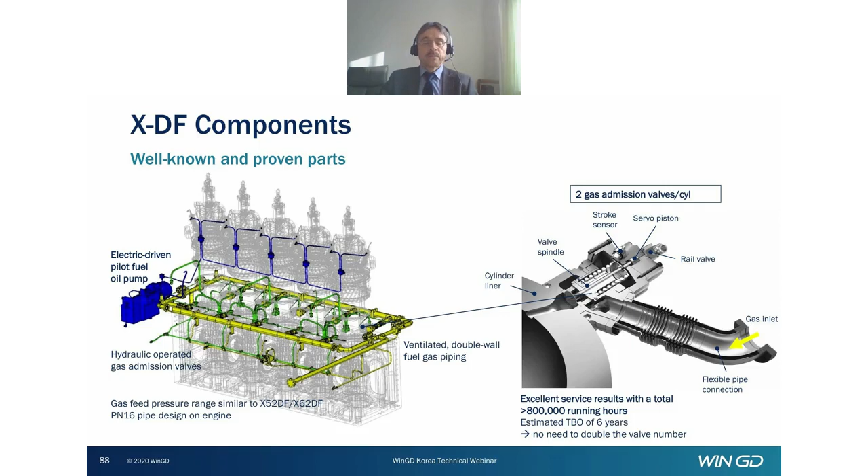Coming to the last slide, the summary. As you have seen, we have really best-in-class fuel oil consumption. We have reduced engine dimensions, reduced piston removal height, very important for this type of ships.

And as the new major step is the iSCR, which will really bring benefits to the ship designer. We have the WiCE control system, also the WiDE engine performance and the predictive maintenance analysis system as a standard.

We further try to extend time between overhauls for good operating results and low costs. And we keep the low pressure dual fuel technology on these engines as well, with low cost, low energy demanding fuel gas system.

I hope you find this presentation useful. I'm convinced we have here 4 attractive engines which meet the market requirements. We have a number of interesting projects, and hope to get within the next months the first orders.

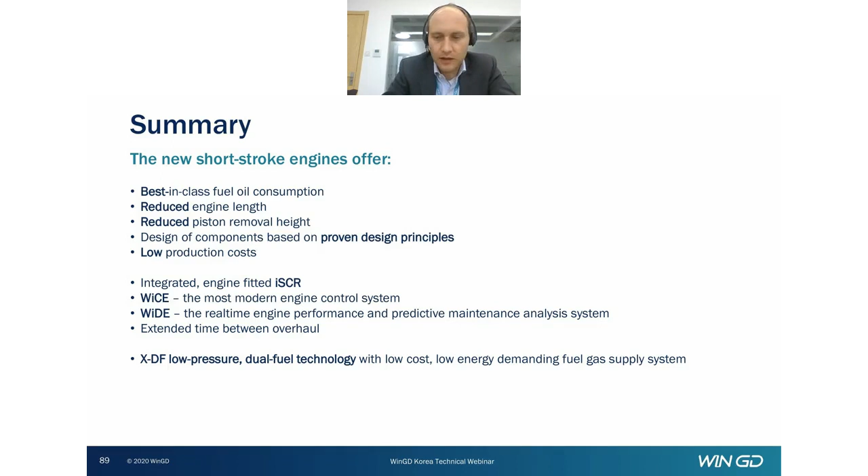And I would like to give you an update of the operating experience we have achieved with our 12-cylinder X92DF engines in service so far.

So first of all, a few of the motivations for LNG as a fuel, very general points. We assume most of you are familiar with the fact that CMA CGM had ordered 2 series of very large container vessels, 15K and 23K size with LNG as fuel.

And there is, of course, a number of general reasons or motivations for that, which are listed here. First of all, environmental improvements are imminent, so within immediate effect, large achievements can be achieved, and we'll see more of that coming.

Regulatory compliance is rather simple. Further reduction of greenhouse gas emissions are possible without major conversions or investments. And also commercially, it's expected to be a very attractive fuel also in the future.

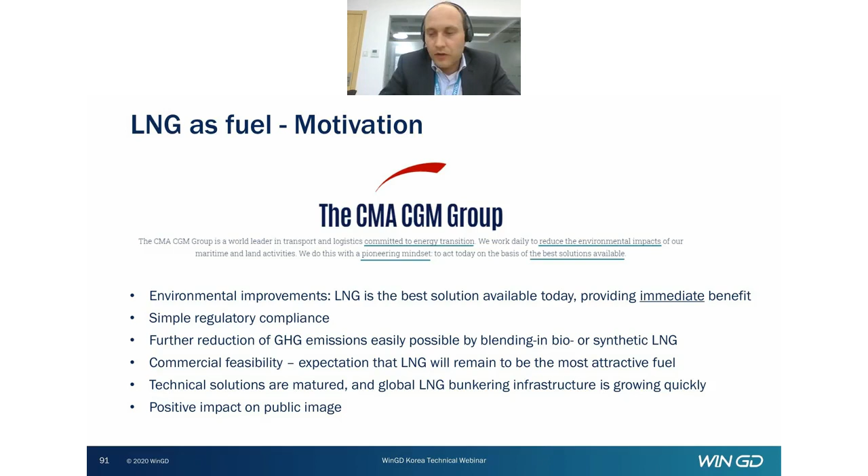So to have a first look at the fleet in service, this is referring to the 23,000 TEU container vessels from CMA CGM. In fact, by now 5 ships are in service, the first of which has entered commercial operation in September last year. You see the first line in the table here, CMA CGM Jacques Saade, the flagship of this series.

This ship has meanwhile accumulated around 3,000, a bit more than 3,000 running hours, and is at the moment on the return trip to Asia for the 3rd call in Asian ports. The other 4 vessels that are in service are also listed here. The last one that has entered service is CC Rivoli.

This ship is on the way to Europe on the maiden voyage, still running on diesel or fuel oil at the moment, as it will bunker LNG in the port of Rotterdam. So total accumulated running hours more than 8,000 so far, and that has already given us some valuable insights into the operation of the vessels and the engines on board.

For this series, 4 more vessels are going to be delivered until about mid of this year, and then there are another 5 10-cylinder vessels coming until April next year.

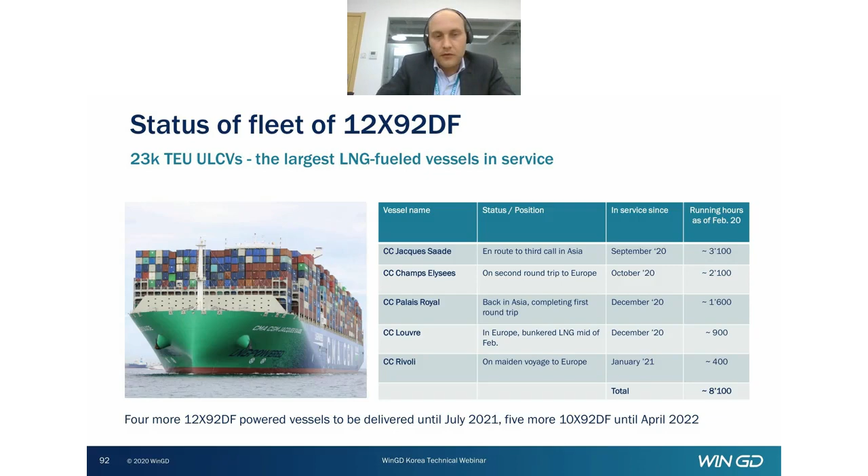During the first bunkering here, actually, 13% of the fuel that was bunkered, of the LNG that was bunkered, was renewable or bio LNG, which has helped to further reduce the greenhouse gas footprint of this vessel.

Several further vessels have been bunkered. Meanwhile, 5 bunkering operations have taken place, and it's fully proven that the safety principles work, all the procedures are in place. In fact, the bunkering is done as a SIMOPS operation, so simultaneously to the cargo handling operation, so there is no loss of time for the bunkering process on these vessels.

As mentioned before, the bunkering infrastructure is expanding, and meanwhile it is also possible to bunker in other ports, for example, Singapore.

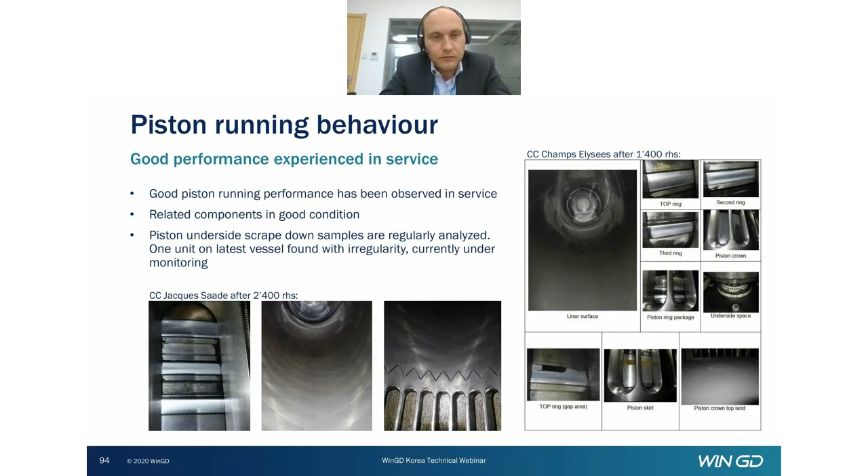This was not a big issue. Actually, the biggest issue was that unfortunately the relief valve seat was not included in the spare delivery due to some mistake that was made. So eventually we also dispatched a service team with the engine maker to take care of this and replace the parts in port. So that's all fixed and back in service again.

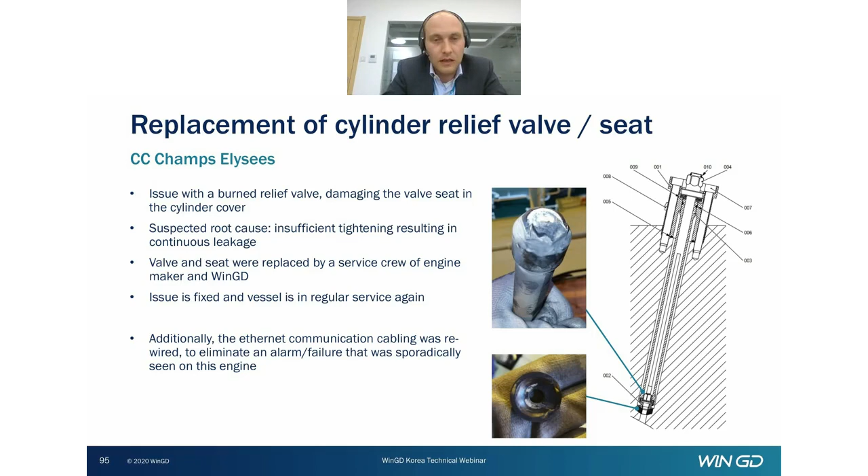Another issue experienced is related to the exhaust valve air spring sealings. We have seen on one vessel that there was an increased leakage of air from the air springs, leading to exhaust valve timing failures at high engine speeds. We have also seen similar issues on some of the 92 diesel engines before, so we have a solution available for this with slightly modified sealing design and improved material. This has been implemented on this vessel with good results, and is going to be rolled out for all the engines in service and due for delivery.

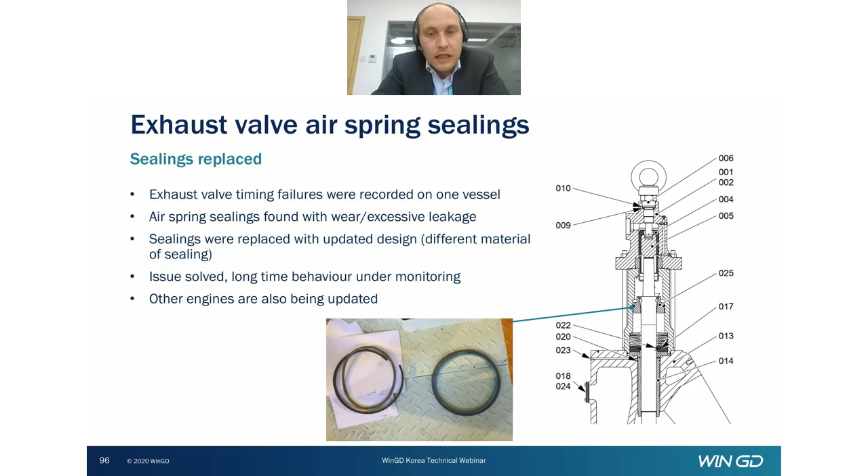We have had one maybe minor issue so far, that the spare modules for the MCP modules need to be installed or pre-installed with the updated software, because the automatic download has not worked from beginning, but that is being fixed at the moment. I would say a rather minor issue on that.

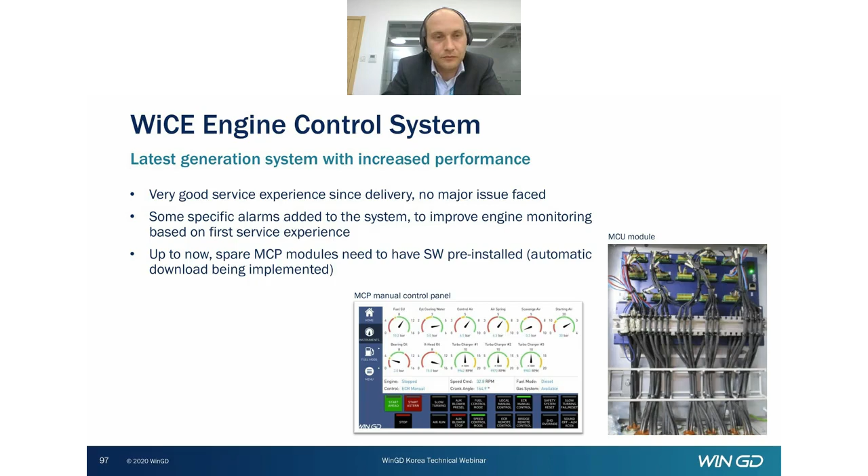Another point we would like to highlight is about remote monitoring and our WinGD WiDE system. On these vessels now we can see a real benefit with these remote monitoring capabilities that we have installed as a standard on all our new engines, and we're really exercising this now on this engine series in terms of following up on engine operation and performance. We see that this really gives a lot of opportunities for operators, but also for WinGD to better optimize engine performance, to support troubleshooting, support the crew in case needed, and also improve the reliability of the engines in service.

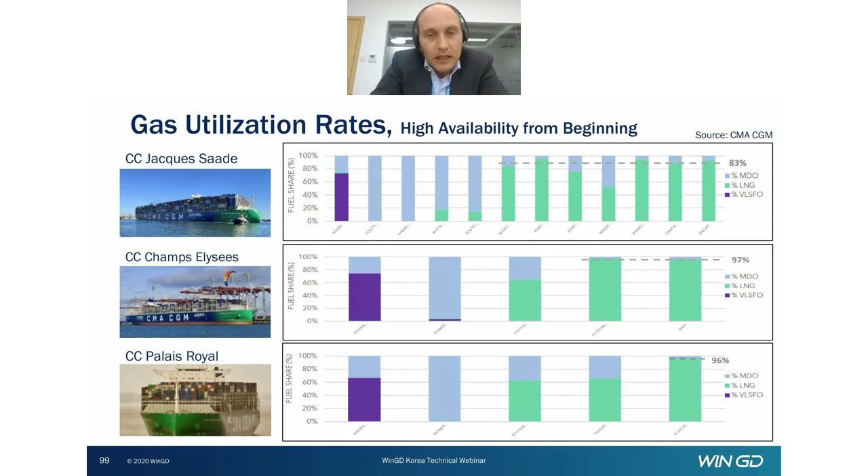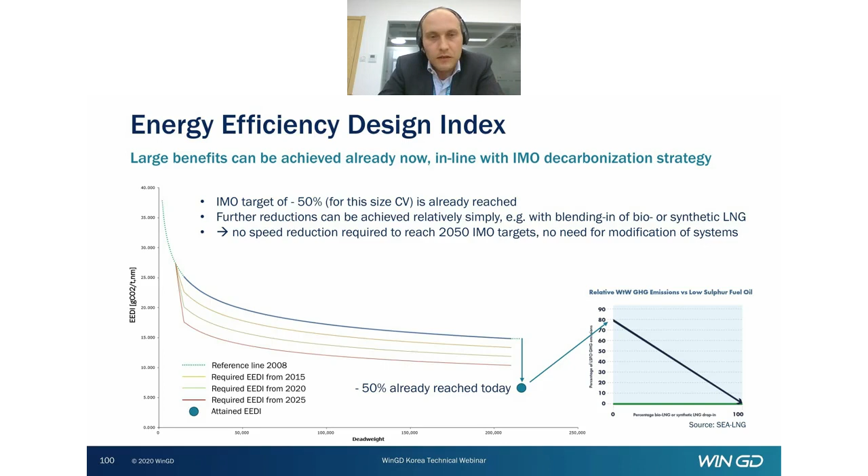Then looking at air quality related emissions, so non-greenhouse gas emissions, which in fact are health relevant for human beings, such as NOx, SOx, particulates, for example - we see that this propulsion solution really offers the maximum benefits available today. You see in the graph, a rather old graph actually that we have shown many times, but we now have full proof from measurements in service that these emissions are significantly reduced compared to a diesel engine, but also compared to a competing high pressure engine.

NOx emissions more than 90% lower, as we saw also in Dominic Schneider's presentation. Sulfur emissions almost nonexistent, and significantly reduced particulate emissions, contributing to more healthy air conditions wherever these vessels are operated.

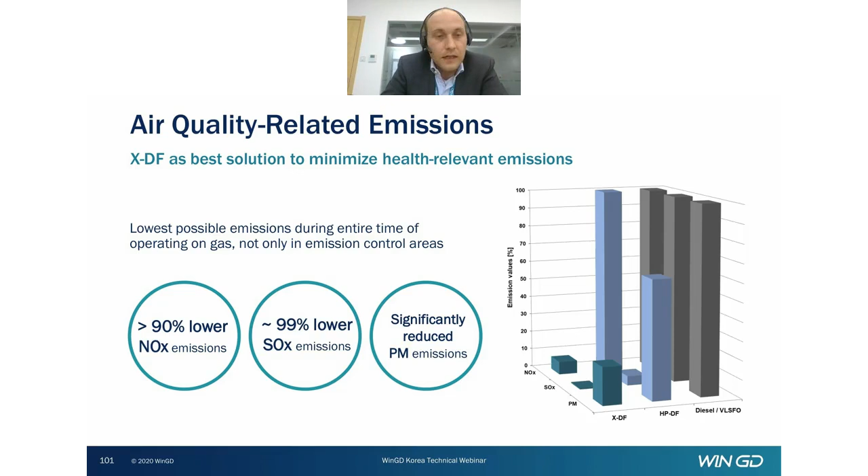So as a summary related to these engines in operation, 11 sets of X92DF engines have been shop tested and delivered. 5 vessels are in service, as we saw, and we've had good experience in service without any major issues. We've had, of course, some smaller issues like oil leakages or so, which are rather normal and could be fixed without affecting any of the sailing schedules.

We are monitoring the operation of vessels closely, also to give recommendations on how to improve operation if there is a potential for that. And we are, together with the engine builder, fully supporting the crew and the fleet management team to make sure that these engines run in the best possible way.

And last but not least, the vessels, as we have seen, are already in line with the IMO's 2030 greenhouse gas targets and have a potential to further reduce without any complicated measures.

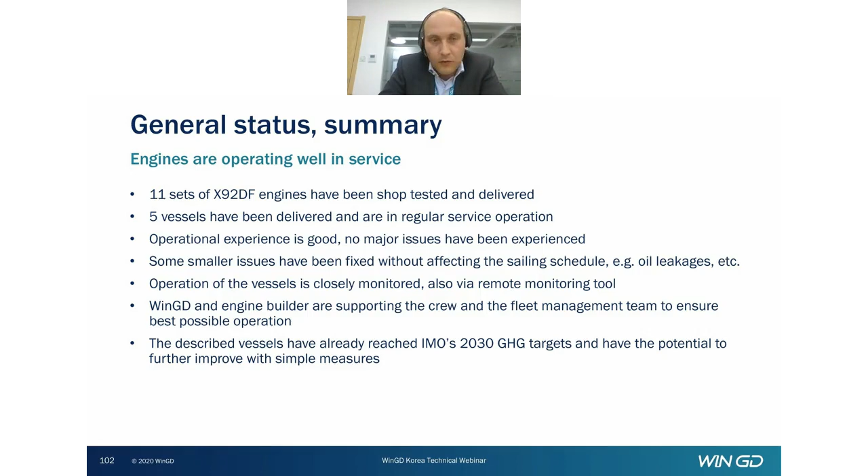Before we finish here, I just have one more slide on another engine type, the X72DF, and the first project that we have for VLCC. This is actually one of the last engines for completion of our dual fuel portfolio, where we have a project in China at SIC in Dalian, where engine production is ongoing and testing will start very soon. Two more projects are contracted in Korea, so also good progress there.

So with this, I would like to thank you for your attention. Thank you for listening, and I'll hand back to SN Kim for the question and answer session. Thank you very much.